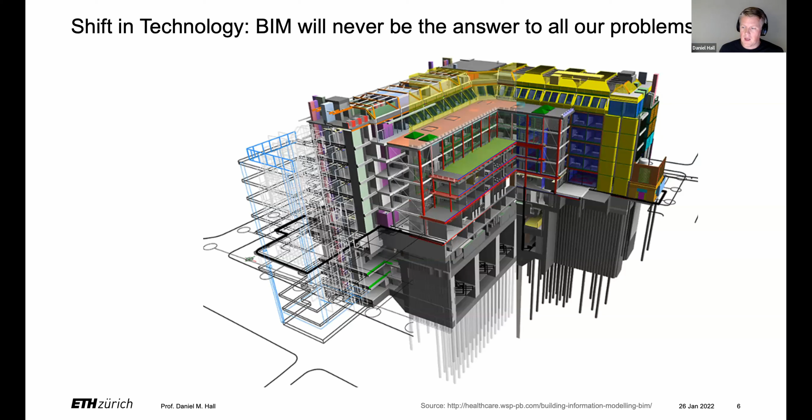Let me start with this position. We're having a shift in technology, and BIM will never be the answer to all our problems. I think we actually had a really great example of the state of the art of BIM for mass timber from the previous presentation. But I sincerely believe that BIM won't be an answer to our problems. And a main reason for that is because BIM is bringing digitalization. Digitalization is good, but digitalization is not the same thing as industrialization. We need to be very clear about the differences between the two.

And before I get into that, I also think that digitalization struggles to solve one of the key problems we have in industrialization, which is an integration between design and fabrication. If you look at the traditional fragmentation in the built environment, scholars position that we actually have 3 degrees of fragmentation. So we have a vertical fragmentation, and we're all familiar with this that work in the built environment. So you have design and construction operations, a big gap between those two.

And we saw good examples of how we need to bring design and construction further together if we want to achieve mass timber or passive house. We have horizontal degrees of fragmentation, which also exist between the trades, right? Structural, mechanical, electrical, plumbing. And then the thing that we don't often think about, which I'm going to challenge us today to think more about, is what we call longitudinal fragmentation, or the idea that we have fragmentation across projects.

And this means that we exist in a project-based industry and our teams come together. We form a specific network of suppliers, an ecosystem for a single project. And we create a lot of really good digital processes, usually in the confines of that project. And the team is probably just getting up to speed right when it's time for the project to end.

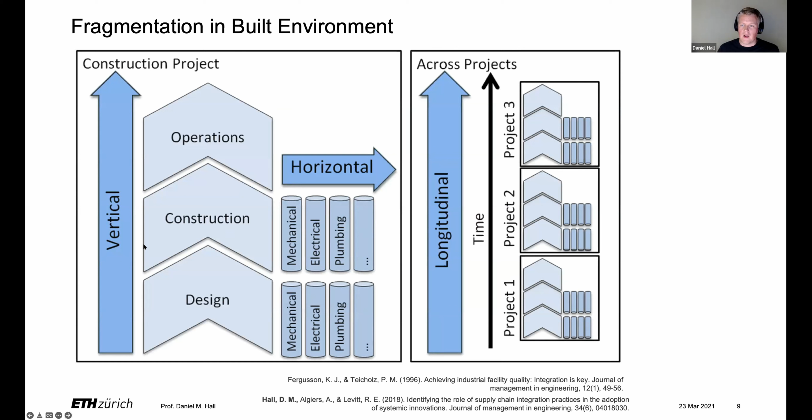And so that's a challenge for digitalization, because what we have right now with BIM merely reinforces these existing fragmentations and tries to find ways to solve them digitally. But industrialization demands a lot more.

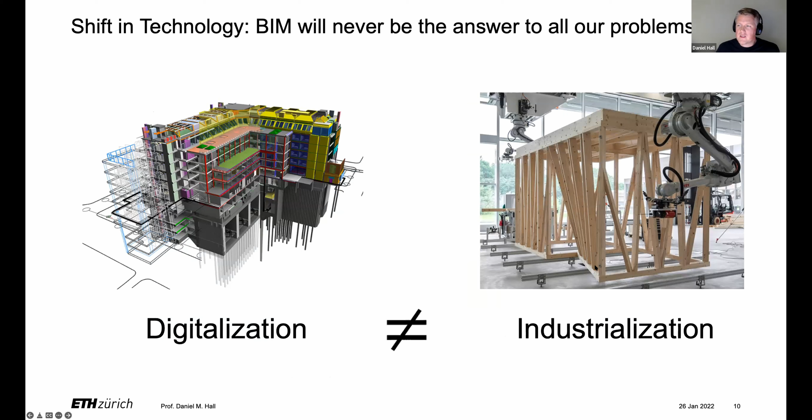And the way that we're thinking about this at our research group is thinking about Construction 4.0 as a new vision for the construction industry, and one that can potentially combine several different technologies and approaches together in order to overcome some of these challenges. And this would include a combination of things like BIM and prefabrication that we've heard today. It would bring in new ideas about in situ or offsite robotics, but also has a key emphasis on the cyber physical, the supply chain logistics, and the data management as well.

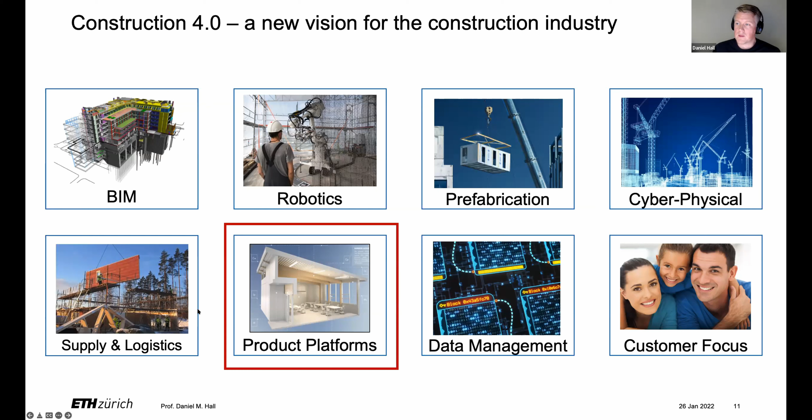But today, I don't want to talk about all of those. There's a lot there. So instead, I just want to focus in on one specific approach that I've seen emerge in the industrialized construction space over the last 10 years. And I think it would summarize what we've heard a lot about this kit of parts or this mass customization. So if you'll indulge me, I'd like to talk about product platforms. So let's talk about product platforms.

We've heard already the idea of Legos. And so there are different types of platforms. There's digital platforms, but we're specifically talking about product platforms today. And the academic definition here is that we have a platform which is a set of common components, modules, or parts that form a common structure from which a stream of derivative products can be efficiently developed and produced.

But that's really boring and academic. I think a much better way to say it is that we're talking about Legos, or we're talking about a standard structure that allows multiple products or projects to be built within the same technical framework.

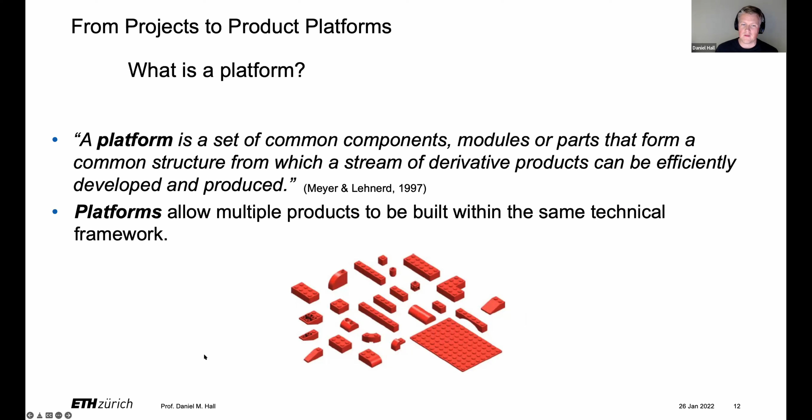And I think it's really important to recognize that platforms by definition are restrictive. So platforms do not enable infinite freedom. The Legos are not infinitely free for design. They have specific restrictions and rules. I call it with my kids the one dot rule, where everything has to fit on this kind of grid of dots. And this is what happens when we have a product platform.

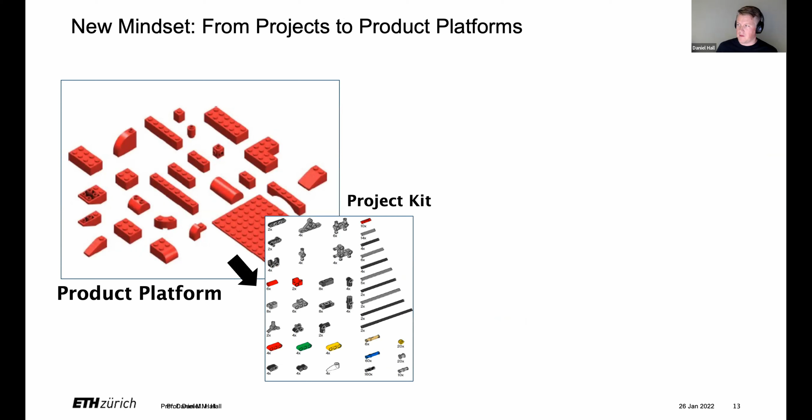We can develop that product platform, and we can start to put our best knowledge, our best lessons into it and feed that knowledge into the product platform so that it improves from project to project. And from our standard product platform, which is continuous, we can then derive specific project kits, which are needed, but that we've spent some time designing the product platform. And then from the project kit, you can create different and unique projects. And this is the relationship between a product platform and the projects.

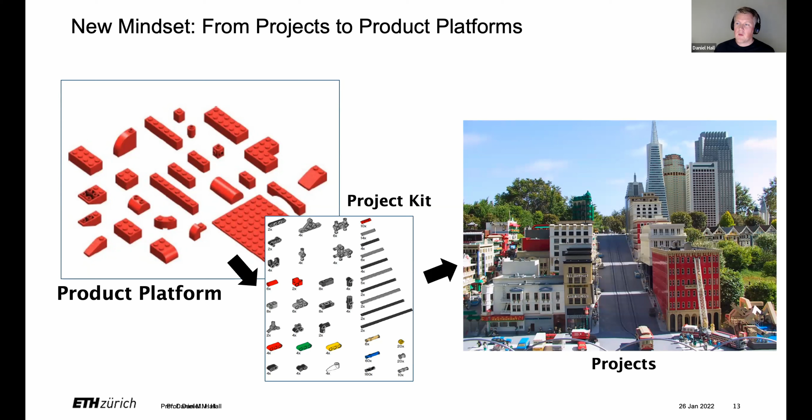And now we heard also the phrase about mass customization. So I think it's important that we also talk about how platforms enable mass customization. What happens is that if you define a hierarchical product structure and your derivative kit of parts, you can start to create options, optioneering, or in the end, mass customization.

What mass customization means is that you achieve product flexibility or design flexibility at a very close to optimum production capacity. So the way of saying it is, if mass production allows you to produce at 100%, mass customization is at 90% efficiency or 95% efficiency. So we have to be careful also how we use the term mass customization, because it refers specifically to a customer and supply chain and production system that comes together.

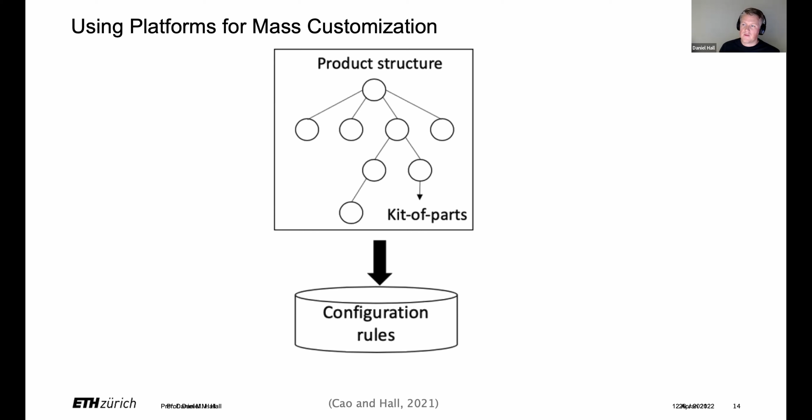And what we need in construction is that we need to take this kit of parts, and if we would like to apply mass customization, we can then think about what are the rules of configuration. How do we think about the different parts coming together? What are the interdependencies between the parts?

And then we can create user inputs or user interfaces, which can allow users to design for mass customization, but importantly, without breaking the rules of the product structure. So a simple way to say that is don't allow someone to design something that does not match with your back-end fabrication system. And in the end, then you have the ability to have a customized product.

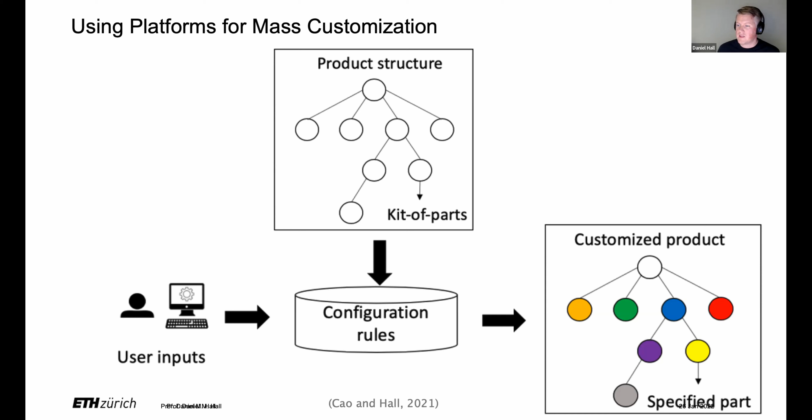That's very academic and probably maybe a little bit boring. You've been listening for 2 hours, so maybe I'll just give a couple of examples of how I've seen configurators emerge in the industrialized construction space over the last 10 years. The first configurator I saw came from a company called Project Frog. They're based in San Francisco.

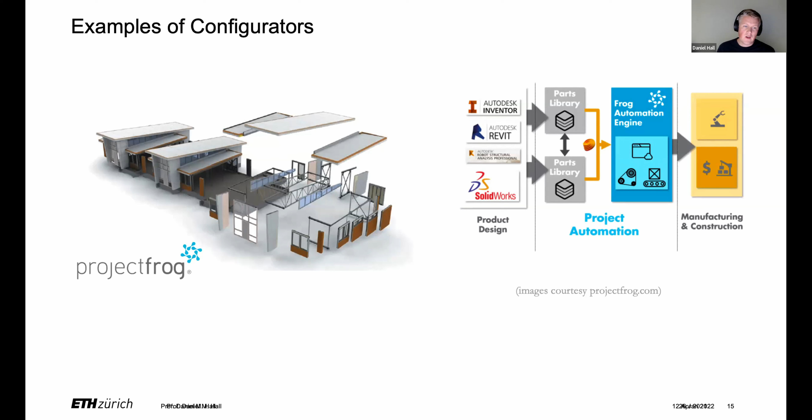And they created their Frog kit, which you see here on the left, a number of SIP panels and I think trusses. They also had some timber approaches as well. And what was really interesting about Project Frog is that they worked on the configurator. They've now moved even more into, I'd say, their kit connect, more into software. But they were delivering buildings without owning any factories. So their configurator helped them configure their buildings just with a simple interface, right?

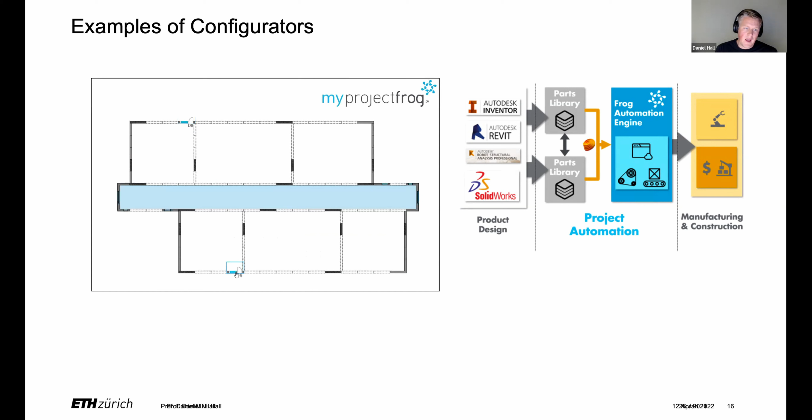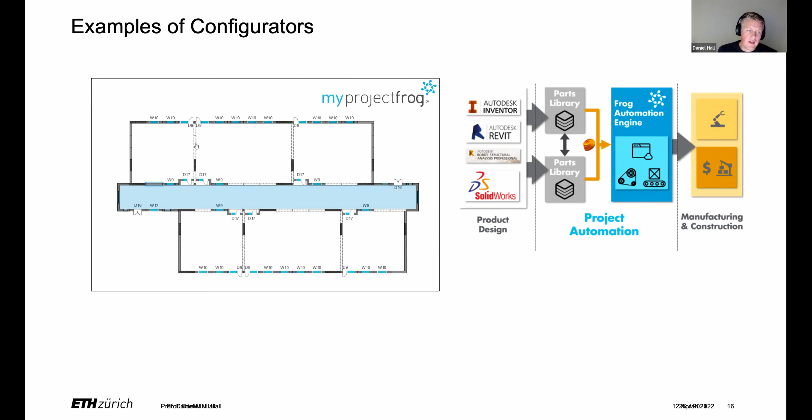So here you have the idea that you can, on a web-based interface, add structural walls, add doors and windows where you might need, and then make sure you're not breaking the rules of the fabrication system that you've set up. In doing so, you can also adhere to local building codes and structural calculations that need to follow, so that you can kind of check the design status.

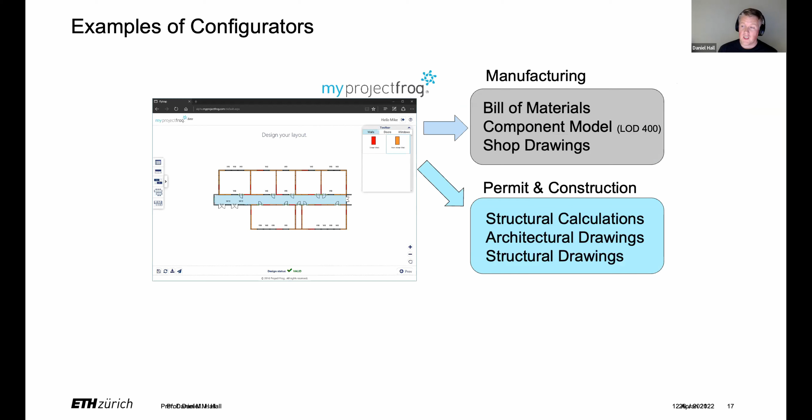And from here, you can then automate the creation of your bill of materials, your component model, your shop drawings, as well as your permit and construction drawings, right? And this was around 2015, 2016, when they were working on this system. And I thought it was a really novel approach to think about how we can achieve mass customization in our industry. More recently, here's an example from where I am now in Switzerland.

This is a company called Mobbot, which delivers, let's say, culverts and other types of concrete infrastructure that might be needed on demand. A lot of this work is maybe exploratory, where you have to dig trenches and you might not exactly know the size of the culvert that you need, or you may not want to pre-order because you might not know exactly the excavation conditions. So their business model is to basically 3D print, with a 24-hour delivery time, specific customized fabrication for their culverts and other types of drainage materials.

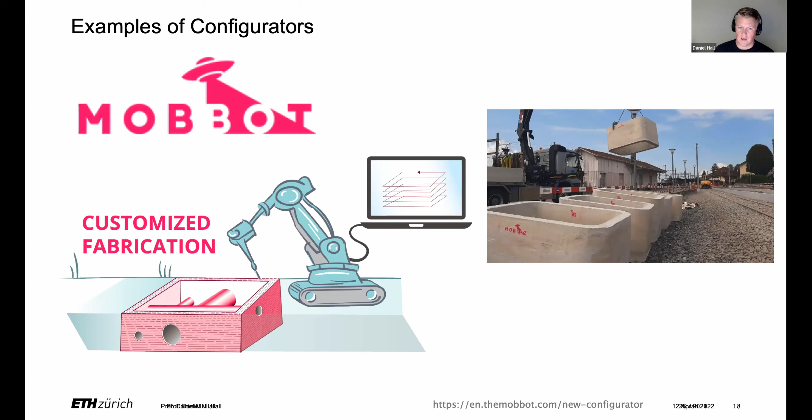And they specifically do this with their online 3D configurator. You can go to their website and configure precisely the size, and this feeds direct file to factory, I guess you could say, or cloud to factory. When you push order, they begin the fabrication process, and then in 24 hours, you can have your mass customized piece of infrastructure.

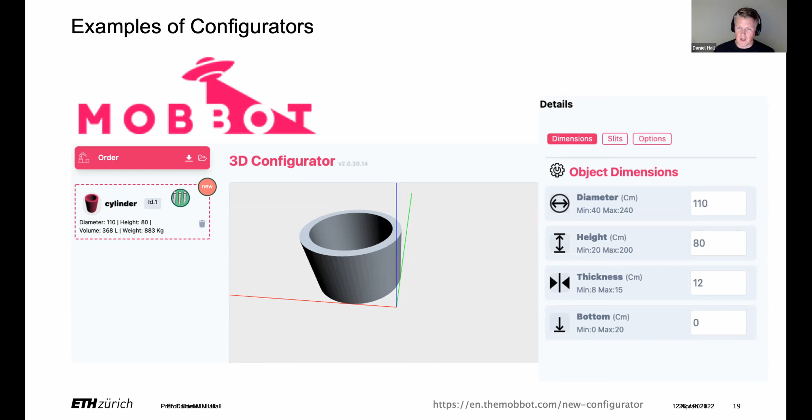And since many of you are located in the Pacific Northwest, I thought I would use another example of this for mass timber, which I think is quite exciting. It's from the startup called Intelligent City in Vancouver. And what's really nice is that they have gone to parameterize the product platform. So they developed their product platform, but they've also connected it with parametric design.

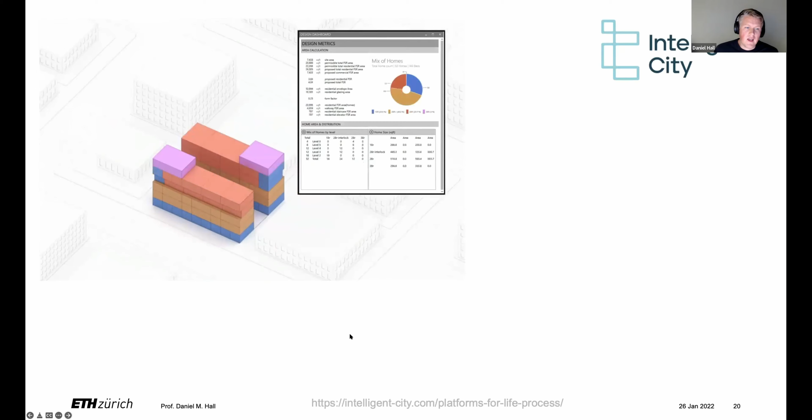So here you can see the idea would be that as you change the design, you can change the mix of homes. You can understand immediately the implications and the changes in the production system, and have feedback both to the types of the bill of materials, the panels that need to be built, and then also the direct connection to their factory, which they're currently building and setting up right now.

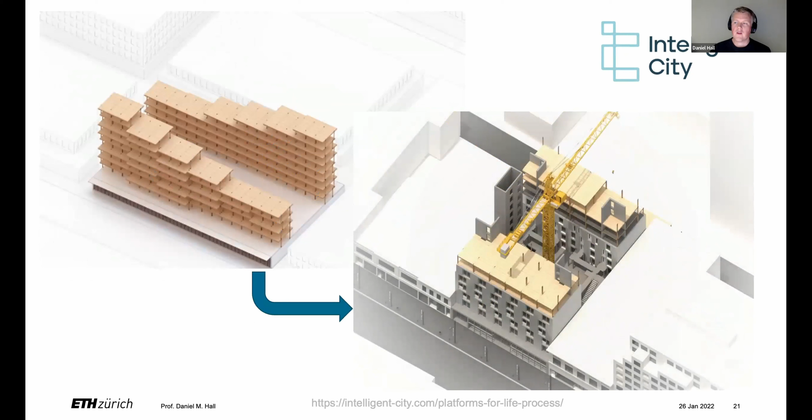And so here you have a direct connection between design platforms that are fabrication aware. The design platforms actually have the embedded rules of the fabrication system, but it's also parameterized, so you can achieve a lot of flexibility. And then you can connect this to robotic fabrication on the back end. And I think this is a profound change that we're going to see in the future, and this is an important thing that this community should also think about.

This is what I would call the old BIM approach to industrialization, although I would maybe change that to say it's more like the current state of the art. And I think what we just saw from Erica represents the difficulties in this process, but it is also important to get this process right. The approach that we use is we typically transfer all information downstream. We start with design. We don't really think about supply chain when we start our design, although we should.

And so we begin with our conceptual design, and we start just adding more and more information to our BIM. The BIM is the repository for each iteration, each more detail. And that's where the level of detail, LOD, comes from. We're providing more and more specific fabrication information until we could get to LOD 400 or 500.

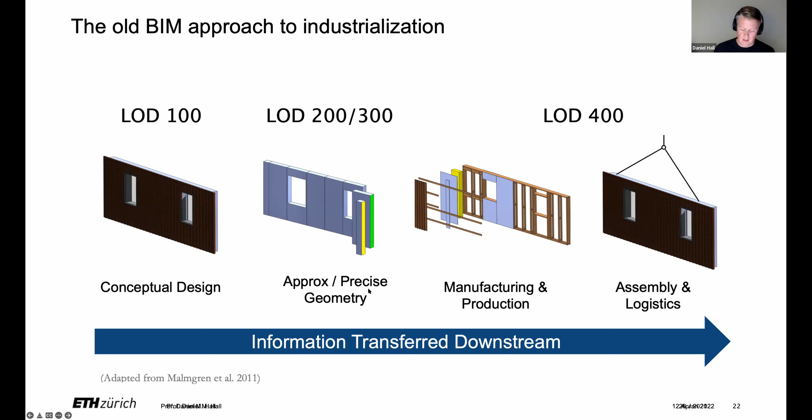We have a fabrication loaded model. Very iterative process with a lot of conversations between your fabrication and your design team. Where we can change is that we can slowly change this away from what we had before, which was approximate precise geometry, and we can start thinking about configuration engineering.

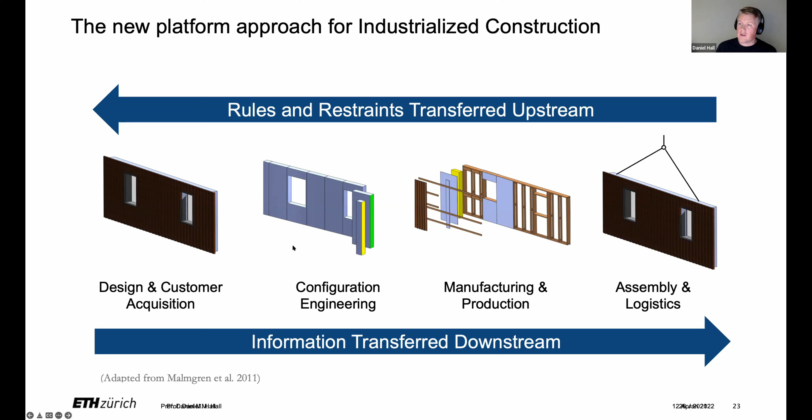And the important point that I'll put here is that the future of industrialized construction is going to be about embedding rules and restraints of your fabrication production system upstream. This will become more important as we continue to add more and more robotics to our approaches. But it does not necessarily have to do that, because you also can just match your design with the knowledge of your production system.

And then I mentioned, it's not just about the new technology or the new approach, but it's also about new business models. If you look at what Steve Jobs infamously said when he first launched the iPhone, that all of the potential applications could be run through Safari or through a web browser. And he received a lot of pushback from developers until eventually Apple opened up the App Store, and then you really saw the iPhone explode as you know it today, as a way to magnify the impact of other developers.

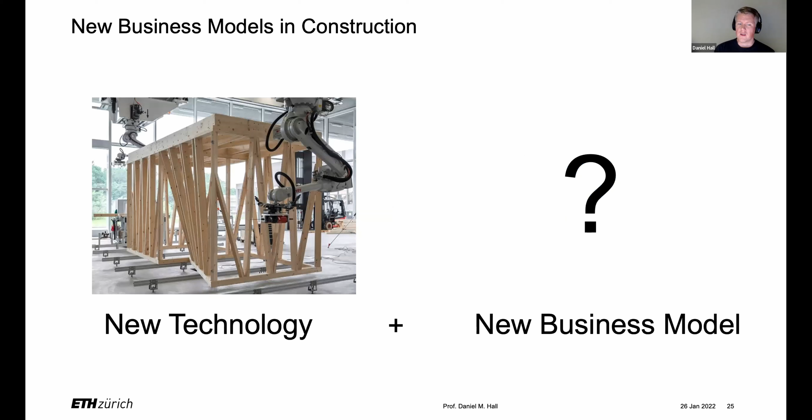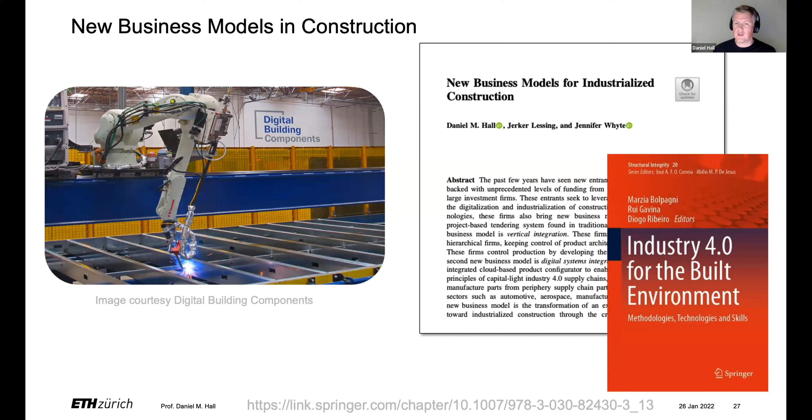We wrote a little bit about new business models. If you're interested, send me a note. I can send you over the chapter to get a sense of how we see this space evolving.

So to summarize the first part, and then I'll quickly go through the second part, how do configurators change industrialized construction? We stop uniquely designing projects, but instead the projects can be configured from a knowledge base that's contained in the product platform. And then that design process must be fabrication aware. We need to think about the implications of fabrication during design, and even better, we need to develop processes and continuity between fabrication and design.

If you're going to invest in prefabrication or industrialization, there must be a clear customer focus because you need to understand what choices the customer will want, and even decide who is your customer. Is it the architect? Is it the end user? These are important considerations that need to be made. What I see happening is a transition away from what I would call BIM as input. So the idea that you just put more information into the model. I think we're moving away from that.

And instead, we're seeing what I call BIM as output, but maybe a better way is to say Revit or IFC as output. We're looking at more lightweight computational codes, or it could even be in Grasshopper, that are generating these high LOD models as the output, but the actual configuration happens in a much more lightweight computational model. And finally, we're seeing an opportunity for new business models and new supply chain ecosystems.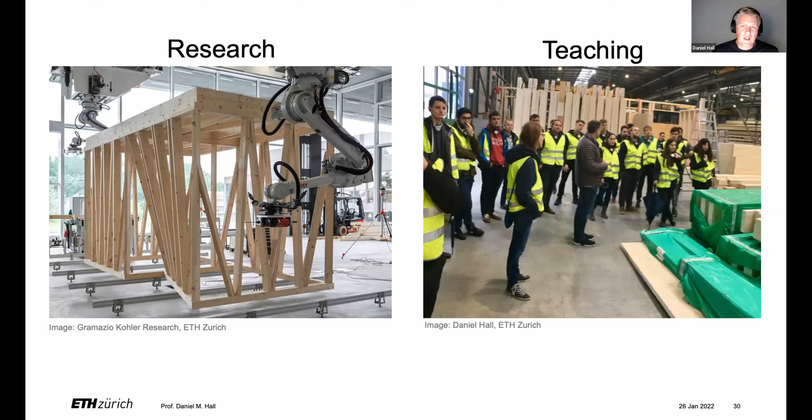And I want to just talk about what I see as the role of research and teaching in an industrialized construction future. As a professor, these are two of the main activities that we engage in. So, on the one side, it's thinking about the research, and on the other side, it's thinking about the teaching.

So on the research, I'm going to give one view of what might the future of industrialized construction look like, and then you can tell me if you think I'm crazy or if this is possible. And then on the teaching side, it's about how do we empower the next generation of students to lead us there. And so I want to present our project.

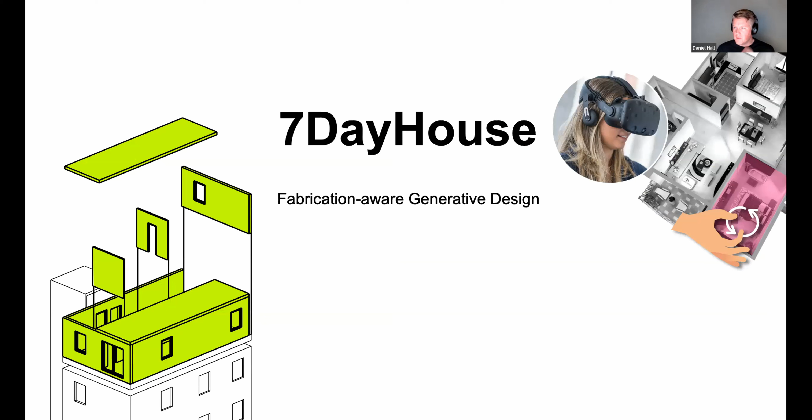It's an ongoing project called 7-Day House, Fabrication Aware Generative Design. I don't want to overpromise this. We've only been working on it for about 6 months, and we have 3 more years of work ahead of us, but I do think it's one future vision of what industrialized construction might look like.

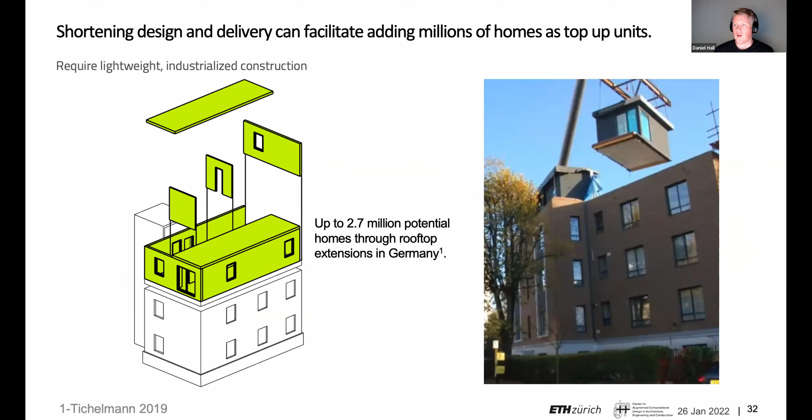Specifically, we're looking at how can we shorten the design and delivery for fabricating millions of homes as top-up units. So the idea of a top-up unit, maybe it's not so useful in single-family homes in North America, but here in Central Europe, we have a lot of dense homes that could add lightweight industrialized construction on top of the rooftop.

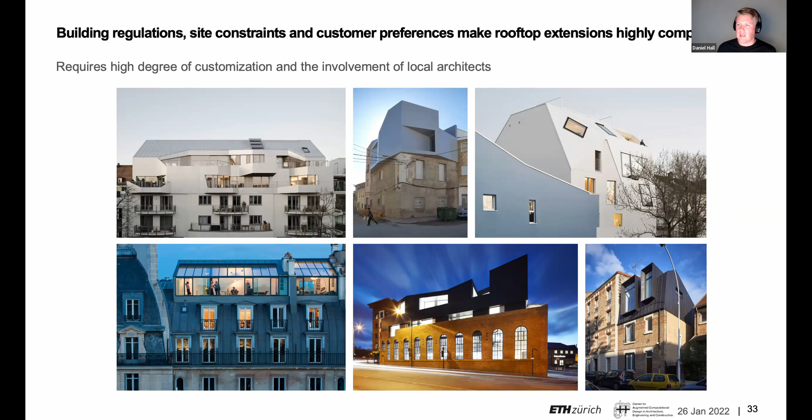And one study said there's up to 2.7 million potential homes that could be built through rooftop extensions just in Germany. But if we're going to do that, top-up units have regulations, site constraints, customer preferences, and they really would require a high degree of customization and of course, the involvement of local architects. So how can we possibly use industrialized construction, which is such a modular, boxy type of system, to achieve these beautiful top-up units?

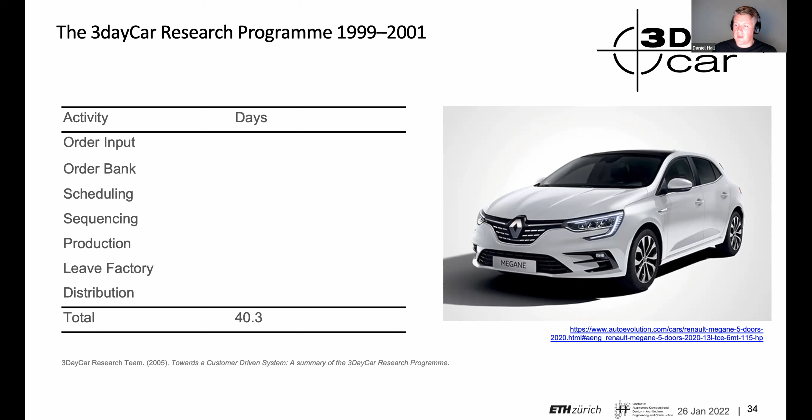We take some inspiration from a program called the 3-Day Car, a research program in the early 2000s, which essentially looked at the process for mass customization for a car. How could you have a made-to-order car? There's a lot there, I don't want to get into all of it, but what the researchers did is they tried to figure out, if I ordered a car, how long would it take for me to get the car? And the answer was 40 days. So a mass customized car took 40 days to deliver. And their goal was to reduce that to 3 days.

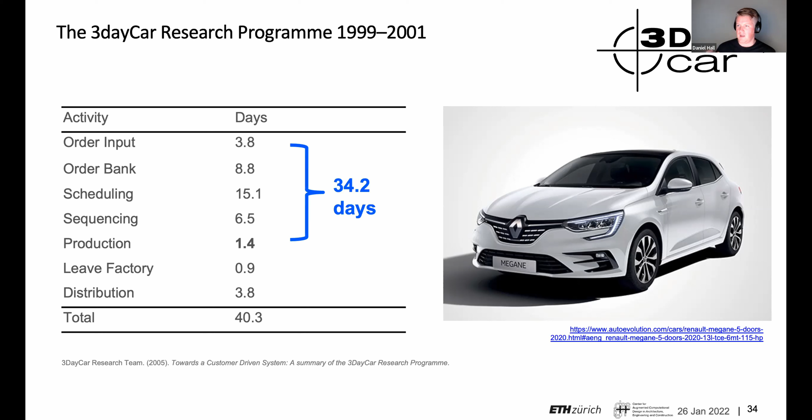Well, when they looked at what it actually takes to deliver a car in 3 days, the production time was measured at 1.4 days. So the actual time on the factory floor was 1.4 days. Then there was some time on the distribution, but the majority of the time came on the order input, the order bank, scheduling, and sequencing. And I would say most of this is around taking the design considerations and translating them into the fabrication line. Processing the order was the single greatest bottleneck in the whole supply chain.

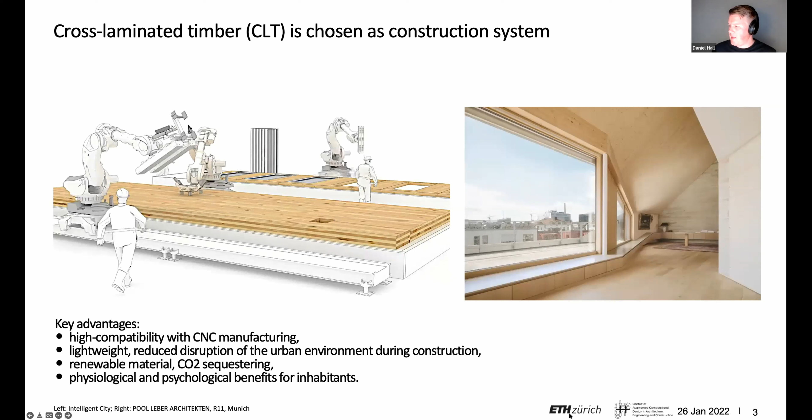So there we take some inspiration. I'm a construction person, but I work together with a team of architects. And I'm going to just jump through this one. We're looking at cross-laminated timber as a construction system because of its high compatibility with fabrication requirements. And then we're thinking about how production constraints can be used to create an adaptive kit of parts library, with the end goal that we can also create a fabrication aware generative design tool, so that in one day we can generate the design and we'd have 6 days to build the house. There comes the 7-day house idea.

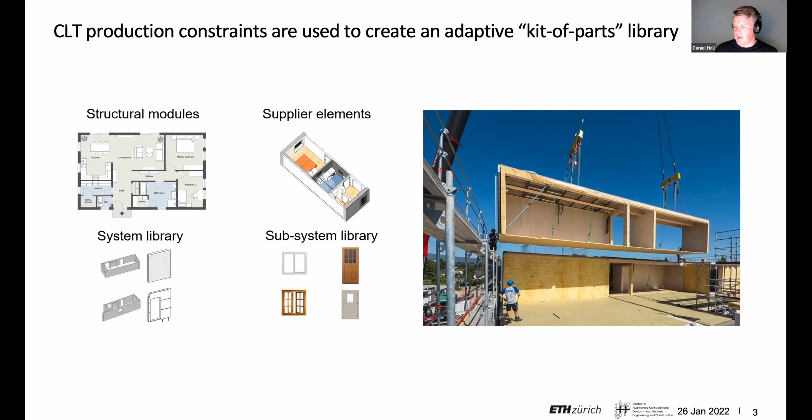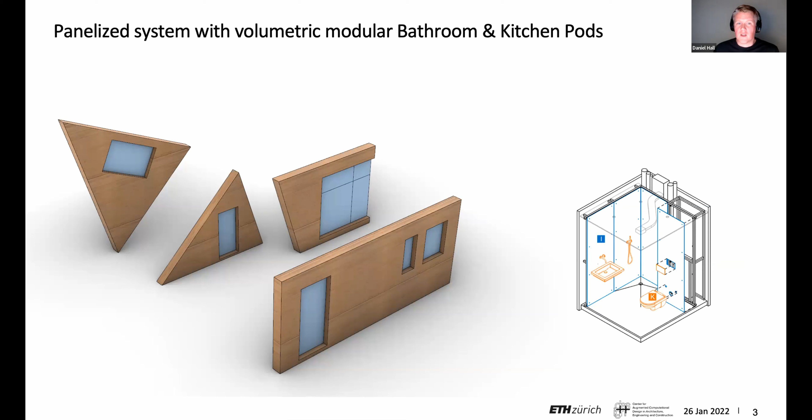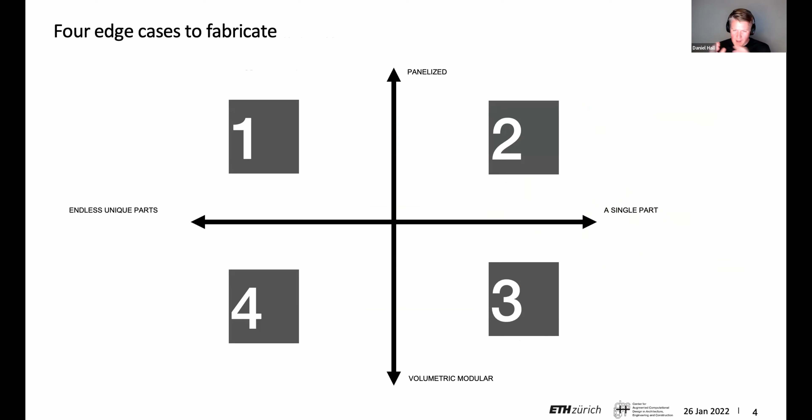We need to think very carefully about how do we define, for example, do we think about a panelized system with volumetric, modular bathroom and kitchen pods? We need to think about what data-driven and real-time configuration looks like. Then we're also trying to think about the different edge cases for fabrication, right? So you could have endless unique parts or a single part on the x-axis here, and you could also fluctuate between panelized and volumetric modular. And how you think about that has specific implications, right?

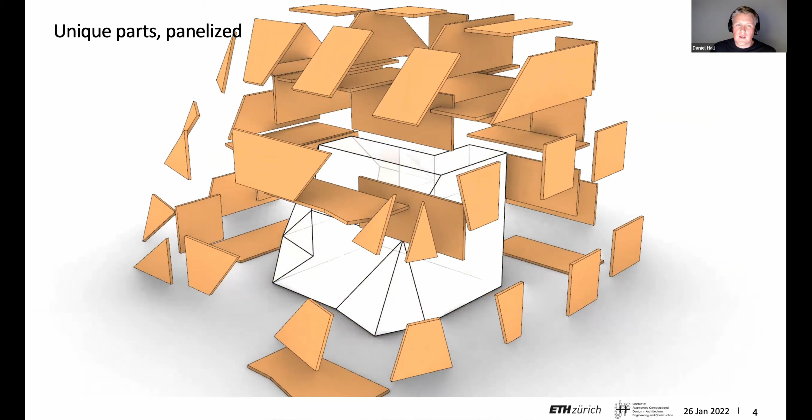So if everything is panelized, this is the one edge case, whereas you could have a single part, a panel over and over again, or you can think about what it would look like to have volumetric modular, or unique parts and specific volumetric configurations. And so we're doing this exercise to help us understand what the edge cases are, and then to create our parameterized and generative design system that can think through things like design language, design freedom, cost, time, and logistics. And the goal is that we want to specifically model things like cost and logistics into the generative system, so we can know the impacts of design choices in that way.

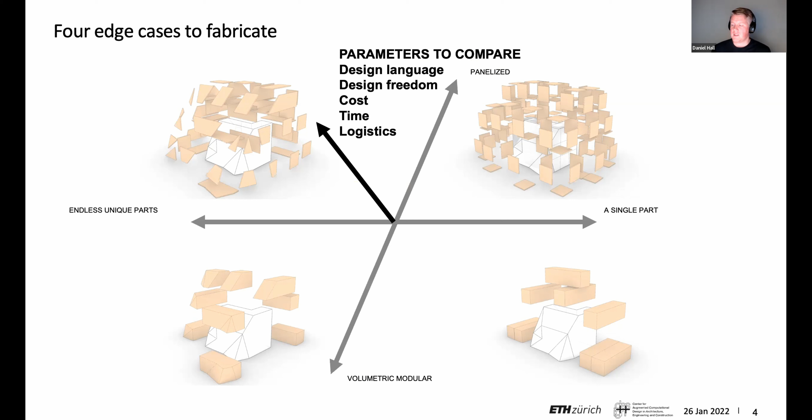All right, I think I'm at 24 minutes, so I'll just quickly jump through the teaching side of things, where we ask the question, how do we empower the next generation of students to lead us there?

The question is, if we believe that industrialized construction has potential for disruption, if we think that this could really be a change in our industry, then how should we prepare the next generation of AEC students to think disruptively? We saw a great example, I thought, in the first presentation about a master's program that combines timber, materials, and fabrication. We need more of these types of things.

What do we do in my classes? I think the first step is, of course, to teach the next generation of students about fabrication. We bring them to the fabrication shops and let them actually see what industrialized production looks like. Both the high-end fancy robots and the building under a roof, which you could argue is maybe just not much more cost effective than doing things on site. But we see both here in the factories in Switzerland.

We also need to think about the new roles that we have to train students for. This was an interview I did back in 2020, where someone at an industrialized construction company said, we need an experienced senior manager, I think they said 10 years experience, with a hybrid background between an industrial engineer and a construction engineer. And that person simply does not exist. There's not a person with that level of experience, or very few people with that level of experience. So how do we train the students for the new roles that might exist?

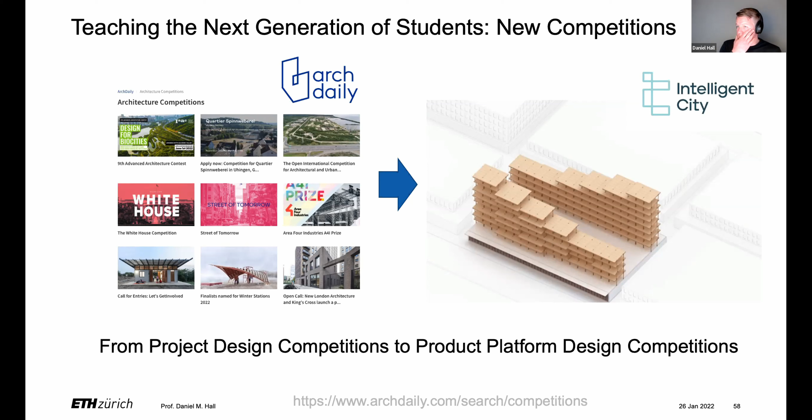What would it look like if we moved towards product platform design competitions? How would that conversation change the way that students and creatives would think about their work? They might think about things like structural performance in a much deeper way.

Good. So just to summarize here, and I didn't have time to talk about all of these things, but on the research side, we see the idea of circularity and circular economy, fabrication-aware design, which I did talk about, design and management for digital fabrication, and new business models. And on the teaching side, it's the concepts of entrepreneurship, fabrication-aware education, new roles, and new types of competitions.